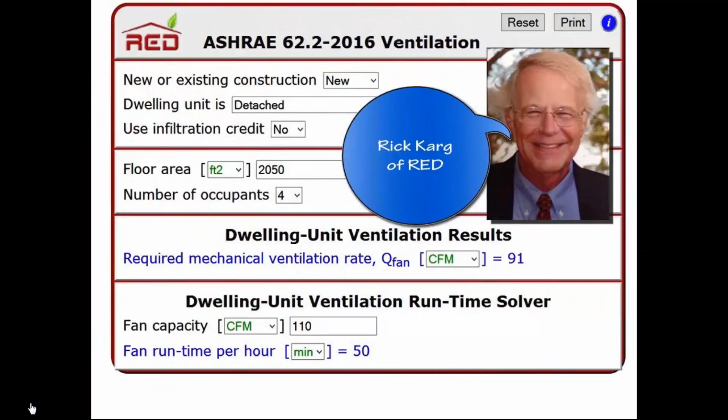I'm going to walk you through the use of the RedCalc free ASHRAE 62.2 2016 ventilation tool. This longer tutorial is for those users who have already watched the short tutorial but want to learn more about using the RedCalc tool in the ASHRAE 62.2 standard. If you're new to using RedCalc tools, please first watch these introductory videos.

This RedCalc free tool is for sizing dwelling unit ventilation in new and existing dwellings in both single-family and multifamily buildings. An important feature of all RedCalc tools is the pop-up help dialog box.

Each input label, which is black font, and result label, which is always in blue font—if you click on those labels, I'll click on floor area now, you see a pop-up help which explains what the input or the result is. It also gives you the allowed range and the normal range, and you can disengage by Xing it out. If you're using a touch device, you just touch the label, the pop-up help will show, then you can exit out the same way.

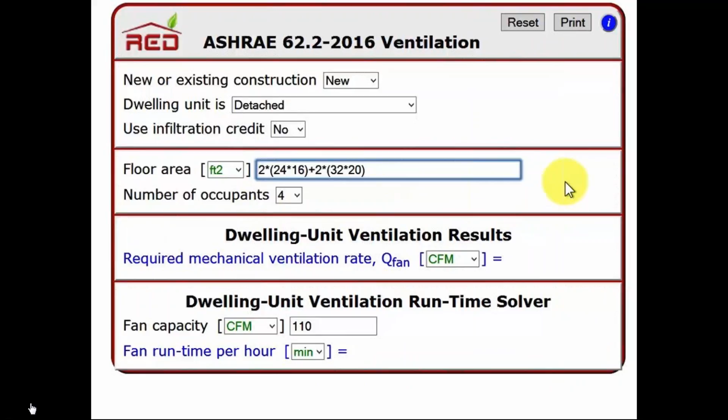Now before I make this pop-up help disappear, notice the allowed range and notice the normal range. If I go to floor area and I enter 400, which is below the normal range, I get an exclamation point indicating that I am out of range and maybe I should check my values. On the other hand, if I make a serious mistake and enter -500 for the floor area, there will be a stop sign that will show, and this will not allow me to calculate anything until I fix my mistake. So one is a warning and the other is a stop sign.

You will find with this RedCalc tool and many of the others, as you select and deselect items, the tool will expand and contract. The last time you saw this, it was smaller. I have changed some of my selections, and now it is bigger. I am going to start at the top of the tool and work down.

First of all, new or existing construction. The ASHRAE standard treats new and existing construction differently. As this selection is changed, the tool will change the things that show and the things that don't show. The example that I'm going to do will be for existing buildings.

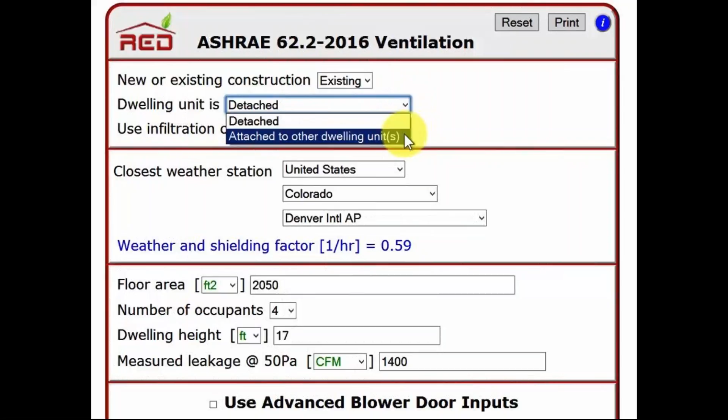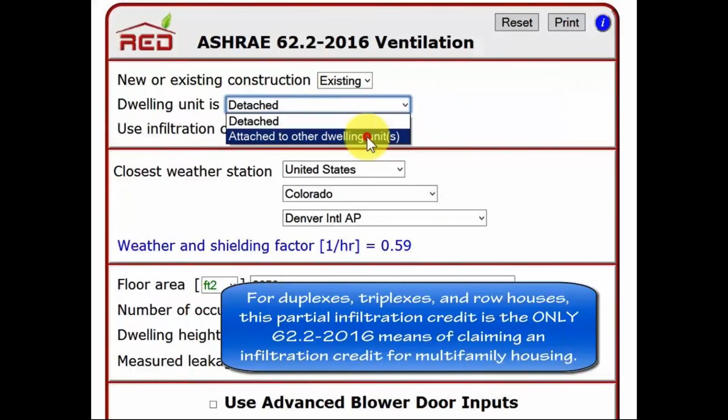The next item, dwelling unit, is detached or attached to other dwelling units. This has to do with a new feature of the 2016 version of the 62.2 standard called horizontally attached dwellings in multifamily buildings. The default for this drop-down is detached. If, on the other hand, I select attached to other dwelling units, notice that another input shows itself.

Only walls are in common with other dwelling units, yes or no. The default for this drop-down is yes. If I choose no, a number of things disappear because in this case, this is now addressing multifamily dwelling units that are stacked one above another rather than only attached side by side. So I'm going to go back now and click yes. So now this is set up to deal with horizontally attached dwelling units in multifamily buildings.

The standard allows a partial infiltration credit for these buildings, and this has to do with duplexes, triplexes, row houses are a few examples. The next input is use infiltration credit.

You can choose yes or no. Notice when I choose no, a great deal of the items in the tool, many of the inputs disappear, because much of it has to do with the calculation of the infiltration credit, which is the most difficult calculation that is done with this calculation aid.

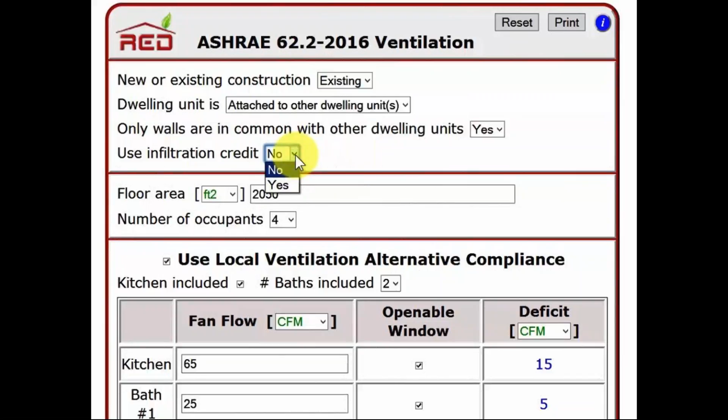I'm going to go back to yes. You should select yes if you're working on a new or existing dwelling and you wish to account for air leakage as measured by a blower door test. If you're using this tool for single-family detached buildings, we recommend you use the infiltration credit. However, if you're sizing dwelling unit ventilation for stacked dwellings in multifamily buildings, that is one above another, the 62.2 standard does not allow the use of an infiltration credit. So in that case, set this choice to no.

The next section of the red tool is closest weather station. Select either the United States or Canada. I've selected the United States. You can select one of the 50 states. I've selected Colorado. By the way, Washington D.C. is not listed as one of the states. If you go to the state of Virginia, you will find Washington D.C. Reagan Airport. So if you are working or living in the D.C. area, you will find Reagan Airport in Virginia data. Here you see for a particular state, the cities that are listed for weather stations.

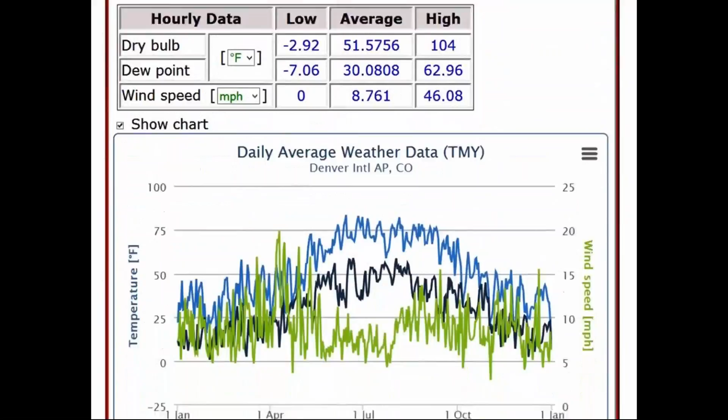There are many other good things you might be interested in with this tool. There's a lot of interesting weather data, and you can find out the latitude, the longitude of the weather station, and also the altitude. We will use this value in a little while.

Again, while you weren't looking, I switched back to the ASHRAE 62.2 2016 ventilation tool. I want to look now at the building data section, starting with floor area, where I have entered 2050. Now that's not actually what I entered. I'll show you what I entered. I'm going to click on the input box here.

This is a two-story house, as you can see from the dwelling height. And I've got 2 times one part of the house, 24 times 16, 2 times because it's 2 floors, plus 2 times the other section of the house, 32 by 20. This feature that we call Math on the Fly allows you to do your mathematics right in the input box. That's why this input box is so long, so you can do calculations like this. If I click outside of the box, you can see you get the result of your mathematics.

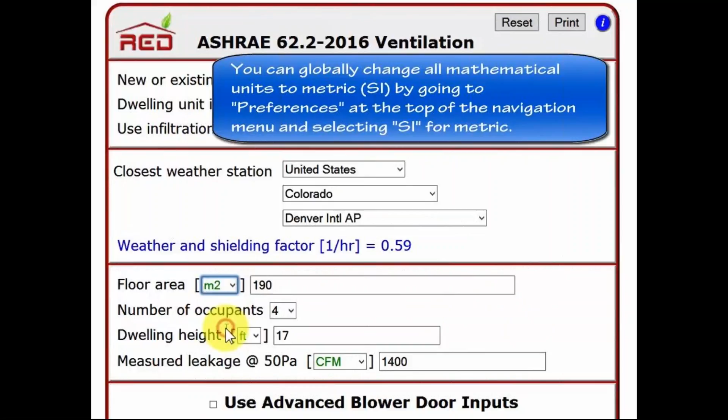2,050 square feet. Of course, you can change this with any of the red tools. We could change this to square meters. We get 190. I'm going to go back to square feet.

A question that often comes up is, should I include basement square footage in a house that I'm analyzing? The 2016 version of the standard clears this up a little bit. It states that if the basement is finished in a manner similar to the upstairs, it should be included in the square footage. Of course, the basement should also be a part of the pressure envelope of the house.

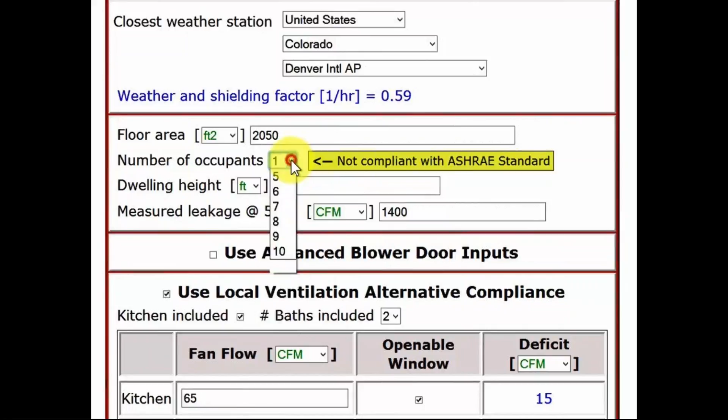Continuing with the building data section, I have scrolled the tool a bit. Next, number of occupants. You have choices here in the drop-down of from 1 to 10 occupants, as you can see. The standard does not allow 1 occupant. You need to have at least 2, but we put 1 in here so you can do what-if problems. Notice what happens if I choose 1. In the tool, a message appears to warn you that it's not compliant with the ASHRAE standard. I'm going to go back to 4 for my example.

The standard allows you to increase the number of occupants over and above the number of bedrooms plus 1. To do that, you merely have to add 7.5 CFM per occupant. The red tool takes care of that for you. The standard also says you may decrease the number of occupants from the number of bedrooms plus 1 if the authority having jurisdiction allows you to do so.

It's not as easy to decrease the number of occupants as it is to increase. To decrease, you need approval.

The next input in the building data section of the tool is dwelling height. The standard assumes 2.5 meters as the height for one floor. If you convert that to feet, that's 8.2 feet. Just in case you're wondering, I have put 17 feet in this example.

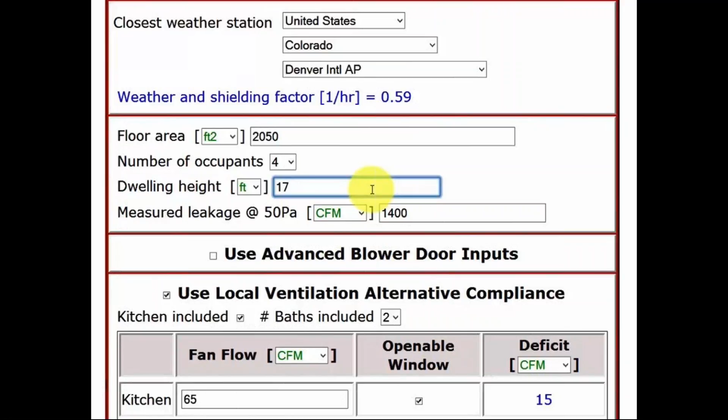The last input in this section is the measured leakage at 50 pascals. I have entered 1400 CFM at 50 pascals, or CFM50. This is a measurement you get from a blower door for the whole house. If the basement is included in your square footage, the basement door should be open for this blower door test. If the basement is not included in your square footage, the basement door should be closed - that is the door from the main part of the house to the basement. This is an important value. It is needed for the infiltration credit, just as the building height is needed for the infiltration credit.

The next section of the tool is Use Advanced Blower Door Inputs. By default, this is not checked, and sometimes you might want to use this. I'll mention when to use it, when we recommend to use it, and when not to use it. In most cases, you probably won't want to use this - it'll take a little bit more time and it makes the tool longer. But I certainly want to explain this, so I'm going to check it.

What we have here is the type of blower door test - pressurization or depressurization - and indoor temperature. If you have a great temperature difference between indoors and outdoors, it's a good idea to go ahead and use this part of the tool. I'm putting down 68 degrees indoors and 10 degrees outdoors. If you want minus 10, you would put a minus before this number.

Altitude - remember this is the Denver, Colorado airport, and from the weather station data tool I got a value of 5413 for the altitude. That's there. And of course, the temperature differences and the altitude have an impact on the density of the air, and that will affect the blower door test. So it's very important that you choose the proper value here.

Is it depressurization or pressurization? Because that affects your results. Notice if I click on pressurization, the resulting adjusted leakage at 50 pascals goes in the other direction. Our start is 1400. If it's a pressurization test with these values, it goes up to 1528. If it's a depressurization test, which is what most of us use most of the time because it's easiest, notice it goes down to 1300.

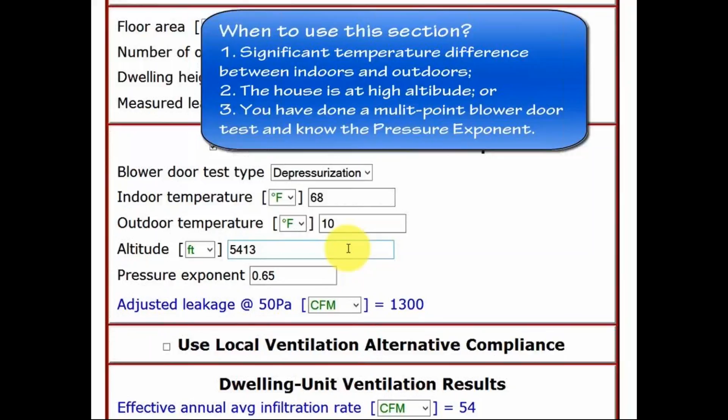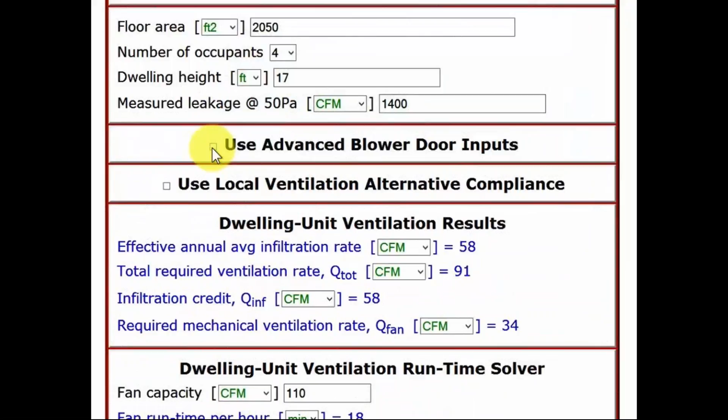Now, as far as when should you use this section - we recommend that you use it if you have a significant temperature difference, say more than 40 degrees between indoors and outdoors. Use it if you are at significant altitude, or if you have done a multi-point blower door test and you know your pressure exponent. Otherwise, it's probably best just to leave this section alone - it will make your calculations a bit easier.

Next, I'm going to talk about the alternative compliance path of the ASHRAE 62.2 standard. That is covered in the Use Local Ventilation Alternative Compliance section of the RED tool. The alternative compliance path is allowed for existing buildings only that do not meet the 62.2 standard prescriptive requirements for local exhaust ventilation fans in kitchens and bathrooms. These prescriptive requirements are a 100 CFM exhaust fan in a kitchen that is demand controlled, and for bathrooms a 50 CFM exhaust fan that is demand controlled.

The alternative compliance approach requires that you increase the flow rate of the dwelling unit ventilation in order to compensate for the deficiencies or deficits in local kitchen and bathroom exhaust ventilation. Using the alternative compliance path is not best practice, but it can save a lot on installed costs.

For the details of the alternative compliance section of the RED tool, first of all, you can select or deselect the kitchen, and notice I have entered values here already. If I deselect the kitchen, you can see it goes away. If I select it, the number I've already entered is there, 65.

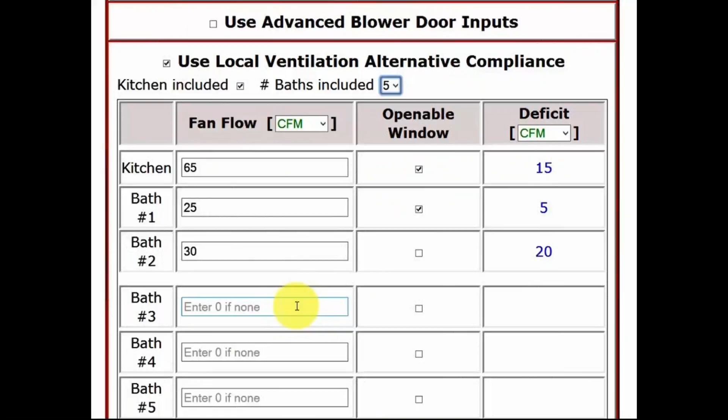And then for bathrooms, I can select anywhere from 0 to 5. If I select 5, notice what happens - there's a default in there. It says enter 0 if there is no ventilation in that particular room. That's a reminder - don't leave it blank, but enter 0. I'm going to go back to 2 for my example, 2 bathrooms.

Then in this part of the table, I have the fan flow. Now, the ASHRAE standard states that the fan flow must be measured - the existing fan flow must be measured. So that's what we have here.

Does it have an openable window or not? If it has an openable window, that has an impact on the total deficit over here. Now notice with the kitchen, if there's no openable window, the deficit increases to 35. An openable window allows you to decrease the deficit by 20 CFM. You can see as I clicked it, that happened here. Kitchen, 65, I measured it, has an openable window. I check that - makes no difference whether it has 1 openable window or 7. I click this and I get a credit toward the deficit of 20.

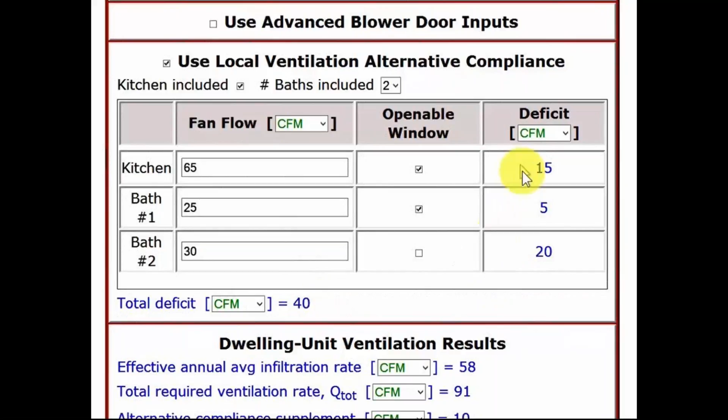Bath number 1, I measure it. It has a fan flow of 25 CFM. Bath number 1 has an openable window. It has a total deficit of 5 CFM. Bath number 2, I measure the fan. It has a CFM of 30. No openable window because it's on the interior of the house. Therefore, it has a deficit of 20. And the entire deficit, all of these added together, adds up to 40 CFM.

Now for the dwelling unit ventilation results. By the way, before the 2016 version of the 62.2 standard, this was called whole building ventilation. First of all, effective annual average infiltration rate - this is a value that you get from your blower door test, and it's an averaged constant flow rate that has the equivalent effect on air quality as the real year-round ventilation infiltration rate. So that's the infiltration. Next, an important number is the total required ventilation rate, or Q-tote.

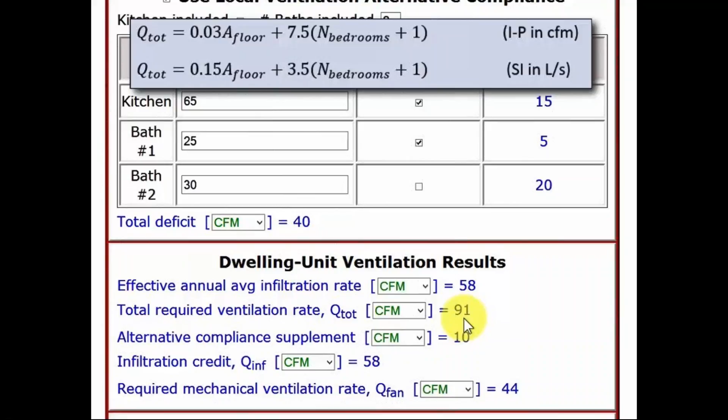Now, Q-tote comes from the equations that are now listed on the slide as an overlay. Q-tote is the total amount of ventilation that we need. This will be made up of natural air leakage and mechanical ventilation.

Next is the alternative compliance supplement. That comes from the alternative compliance path section of the tool just above. And remember, for our example, the total deficit was 40. We divide that by 4, and that gives us 10. So that number gets added to the 91 from Q-tote. So now we have 101.

Next is the infiltration credit. This comes from our blower door test also, and it is Q-inf for infiltration. And for existing homes, this value, 58 CFM, will always be equal to this value, the effective annual average infiltration rate. However, for new homes, the infiltration credit is limited to 2/3 of Q-tote, this value right here.

So we have 91. We add the alternative compliance supplement to that. We subtract the infiltration credit amount - this is the amount that is coming from natural air leakage, and the remaining amount is the required mechanical ventilation rate, or Q-fan. For this example, that is 44 CFM.

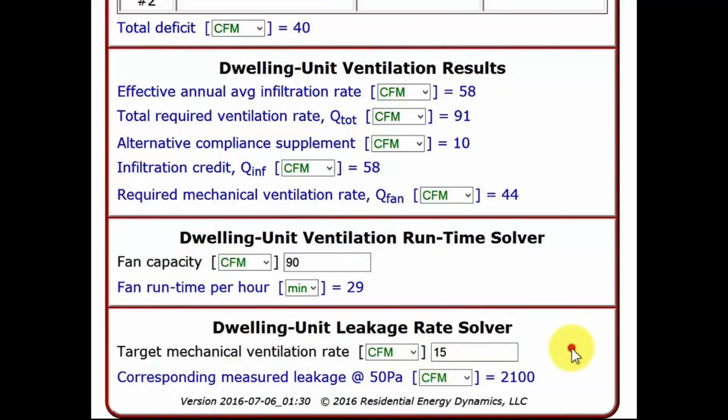You could enter any number in here, for example 0, and you'd end up with 0 ventilation for the characteristics of the building if your corresponding leakage rate was 2500. I'll go back to 15 here, click outside the box. Again, you see 2100.

Before I finish, there's one thing I said I'd go back to: the infiltration adjustment for horizontally attached multifamily. Remember, if the multifamily units are stacked, one above the other, there is no infiltration credit allowed, so you would choose no right here. But if they are horizontally attached side by side, you would choose attached to other dwellings. Another input appears, a drop down: only walls are in common with other dwelling units, and that has to be yes to take this credit.

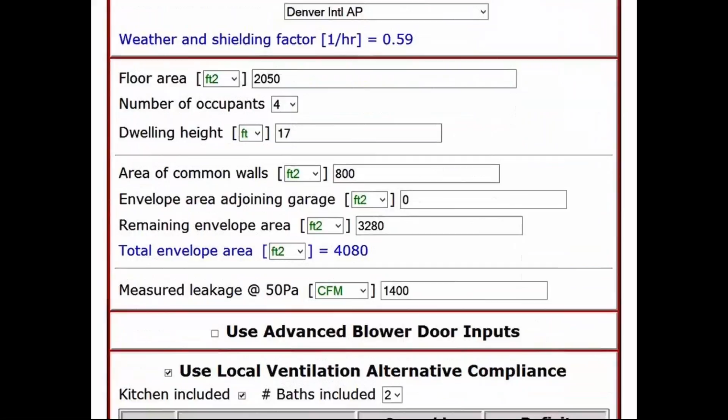If those drop downs are engaged, you will find further on down in the tool there are some other inputs that show, and you must fill these in.

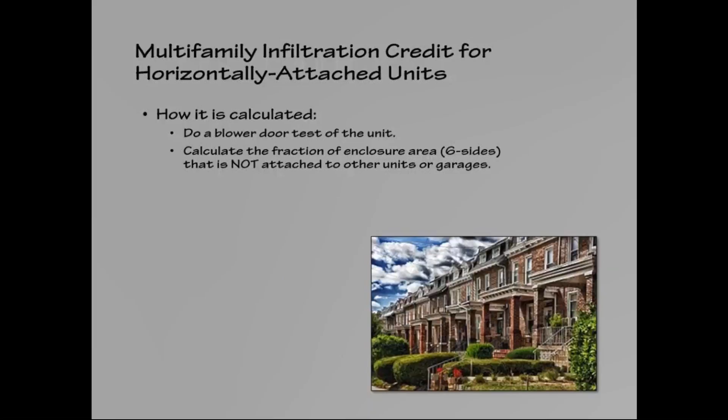First, you have to do a blower door test of the unit. What's different about horizontally attached units versus a detached unit is that with horizontally attached, some of the surface area is in common with units next to it. So we do a blower door test and an adjustment to account for the common walls. We calculate the fraction of the enclosure area, the 6 sides, that is not attached to other units or garages, and that's what we take as our infiltration credit.

We multiply the infiltration estimate from the blower door test by this fraction, shown in the equation: Q fan, the amount of mechanical ventilation we need, equals Q total minus Q infiltration. This is for detached units, but for horizontally attached, we have A sub exterior, or A sub ext, equal to the exterior surface over the total envelope surface. For our example, this ends up being 80%, or 0.8. So we're only allowed to take 80% of this amount and subtract that from Q total, so Q fan goes up.

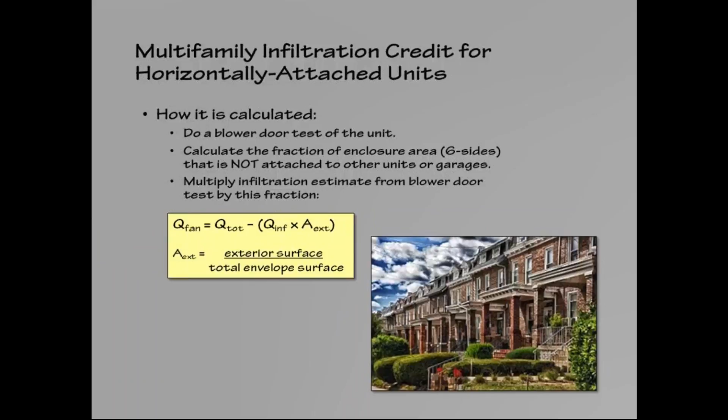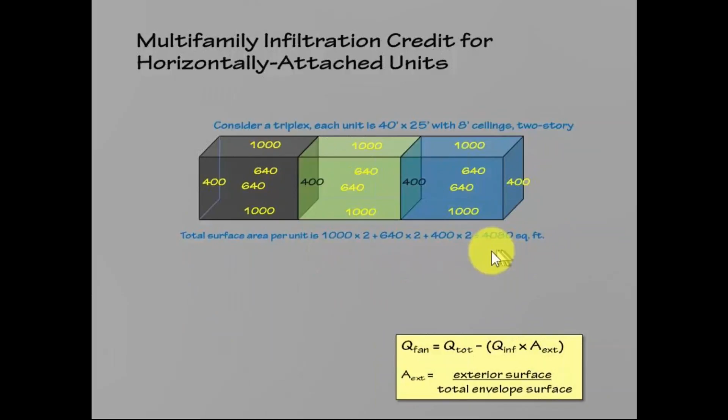So the total surface per unit is listed here, and if you want, you can stop the video and check my figures here and try to figure this out. It's rather complex. The infiltration adjustment we have here for the end units, this one and this one, we multiply Q-inf by 90% or 0.9, and for the middle unit that we're using in our example, A-sub-exterior is 80% or 0.8. So that's how we figure it out. Now you can see this is rather complex.

The nice thing about the RED tool is it does all of this for you. You still have to do some measuring and enter the values, add some things together. But remember, you can use the math on the fly of the RED tool. It helps you out.

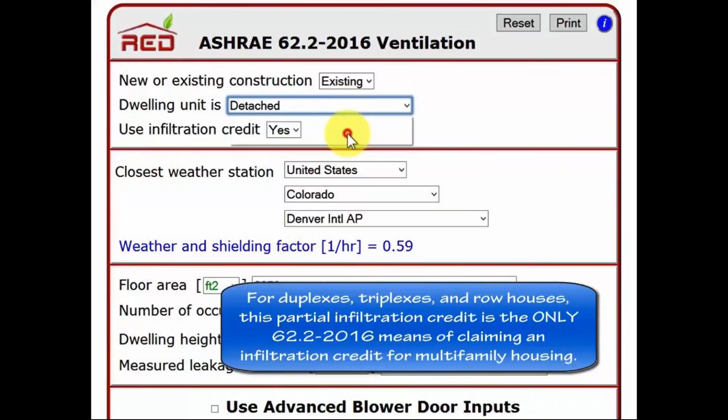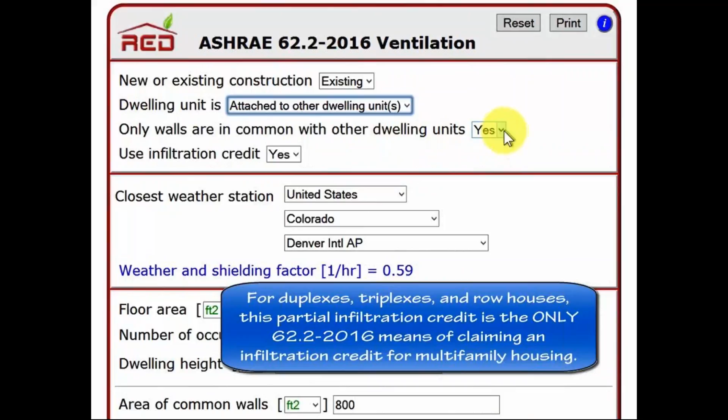Continuing the horizontally attached multifamily dwellings in the RED tool, our example so far has been with dwelling unit is detached for the horizontally adjacent units. I'm going to select the dwelling unit drop-down. Then a new thing appears: only walls are in common with other dwelling units. The default choice for that is yes.

And then as we scroll down past the weather station data, that's going to stay the same. The beginning of the building data, we're leaving all those the same. But then this new area appears when we select the drop-downs for horizontally attached dwelling units above. And from our illustration that we just looked at, the area of common walls, we're looking at the center of the 3 row house units, 800 square feet. Envelope area of adjoining garages, we have 0 for that. And then the remaining envelope area, 3,280, which gives us a total of 4,080.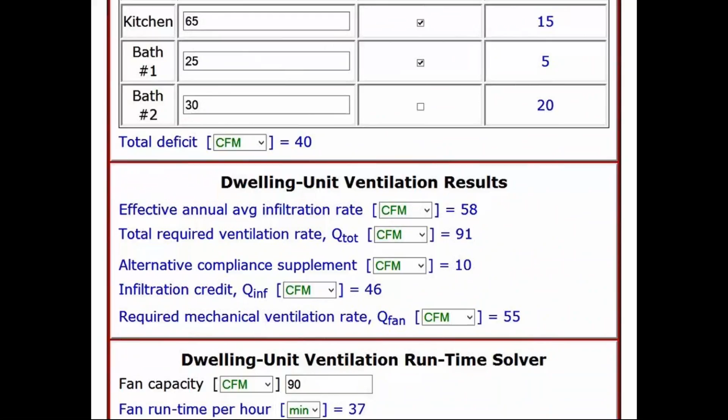Now that has an impact on the infiltration credit. Remember, with the illustration, we came up with an A-sub-exterior value of 80% or 0.8. So now you see our infiltration has gone from 58 - we still have that value up here - but we take the 58 and multiply it times 0.8, which gives us 46, or 46 CFM is what we get for the infiltration credit.

So the infiltration goes down, which means a larger portion of Q-tot has to come from mechanical ventilation. So our mechanical ventilation goes up to 55 from 44 that we had with the single-family detached dwelling.

So I hope this shows you how the horizontally attached infiltration credit feature of the RED tool works. And of course, the RED tool is based on the ASHRAE 62.2 standard precisely, so you can be confident that everything that you do with the RED tool will comply with the ASHRAE 62.2 2016 standard.

Mm-hmm. And close. Present PowerPoint. Yeah, there you go.

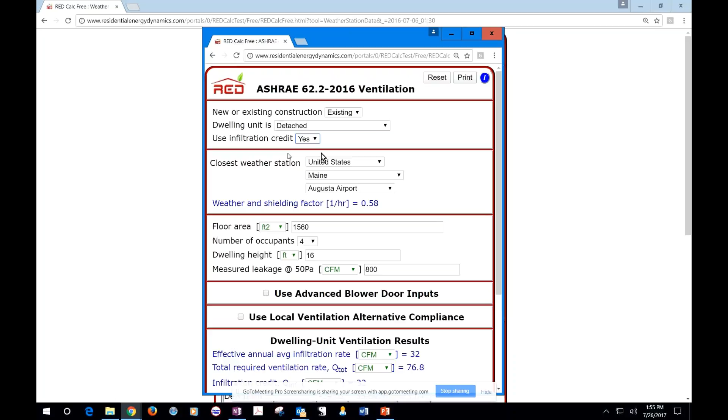So what you would have to do on the tool, I'm going to drag the tool in front of you. You would just click no there. Use infiltration credit, no, and that would go away.

If you're not using an infiltration credit, you can see that most everything in the tool disappears, and that's to prevent you from entering something that's not needed or does not correspond with the ASHRAE 62.2 standard. Notice there's no place now to enter a blower door number, since a blower door value is only needed if you're taking an infiltration credit. So if you've got multi-family units, there's no blower door required. It's merely the ventilation rate based upon the floor area and the number of occupants, and that's it.

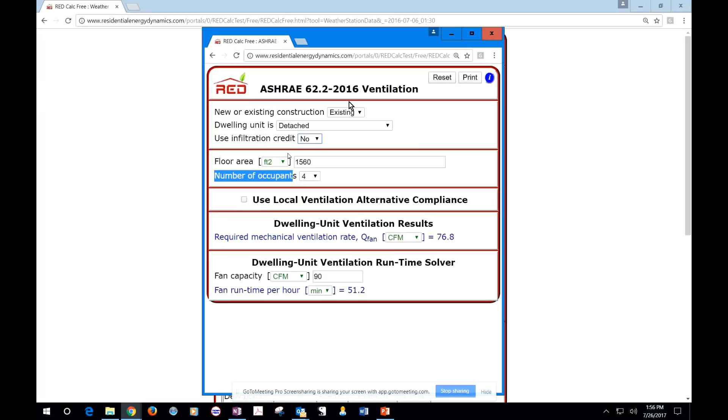And it's good to ask yourself, if you go across state lines for this, is Berlin a lot like Bethel in terrain and all of that? And the answer is yes. I would not choose the Mount Washington weather station, which is the most severe of all 1,100 weather stations in North America because of its high wind. So that one you just leave alone - you never choose that, even if you're right in this area of Maine. It'd be best to choose Berlin.

Now here we have a triplex, but in this case the units are not horizontally attached, they are stacked one above another. So what they have in common are floors and ceilings. According to the ASHRAE standard, no infiltration credit is allowed in this case.

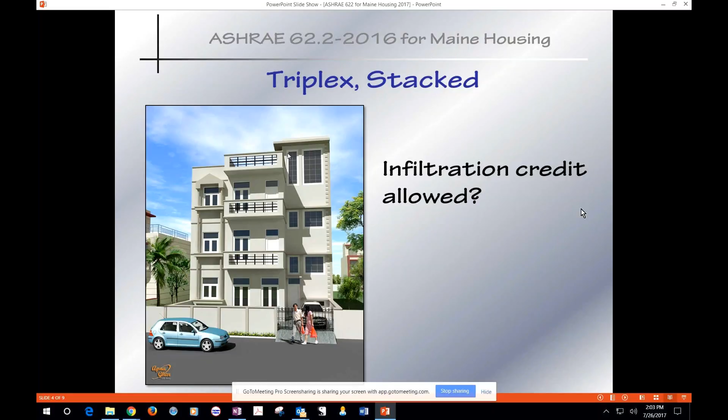Okay, so no infiltration credit is allowed here. With this one, we have a triplex again, and each unit is on 3 floors. Garage is primarily the first floor, living area, then bedrooms on the third floor. Is an infiltration credit allowed here? The question to ask is, is the only common building assembly walls? If that's the case, then a partial infiltration credit is allowed. You can go through that on the red tool, and we will do another example. There are no stacked units here, so this is allowed a partial infiltration credit.

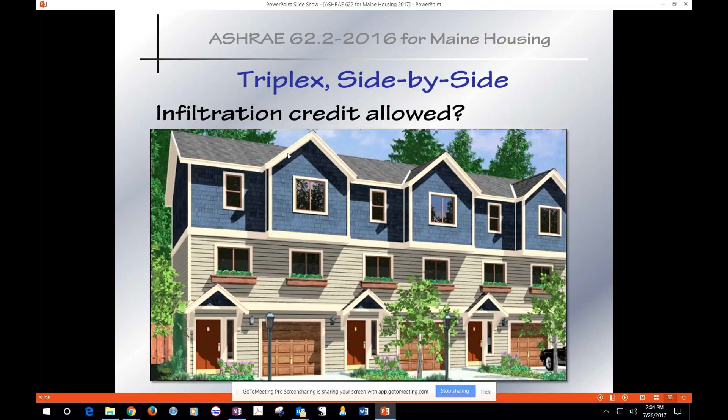So just to briefly go over what the video looked at: this is the way in the ASHRAE standard, right out of the standard, this equation, the Q-fan equation. How is it calculated? We do a blower door test. Now, the standard does not specify how to do the blower door test.

Let's assume you are looking at a duplex or triplex, and you're looking at one of the units. What's the best way to do a blower door test? Some of you might know what a guarded blower door test is. It's one of 3 ways you could do a blower door test in a horizontally attached building.

Let's say you've got a duplex and you want to do a guarded test. To do a guarded test, you would need 2 blower doors. You would depressurize each of the units to -50 pascals. For the subject unit, this eliminates any leakage through the common wall, so you only have leakage through the exterior walls. That's one way to do a blower door test on a duplex.

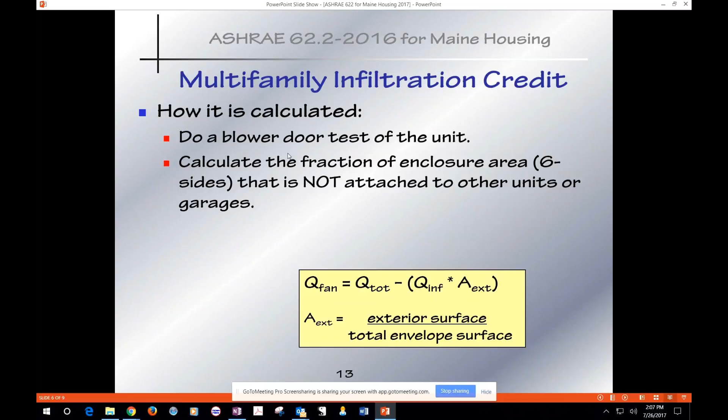There's a format for you to enter those values in the red tool, and we will go over that. Multiply the infiltration estimate from the blower door test by this fraction. We get a number here. Oops, I didn't mean to do that. We calculate A exterior as mentioned in the video.

So here we are. Let me just get a sense of where I am. I'm sorry about this. Okay.

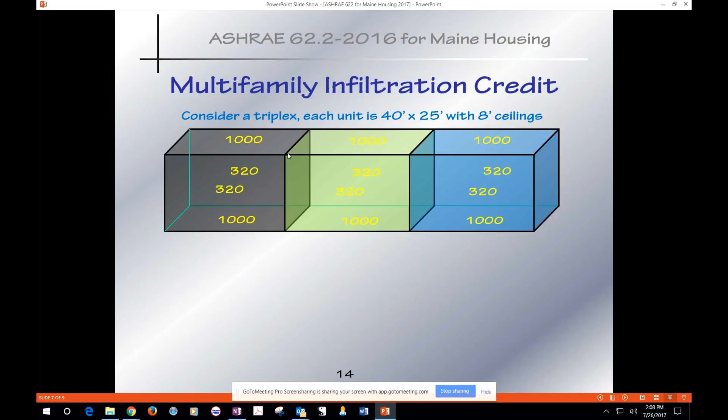So that's how this would be measured. Don't forget to measure the floor. So the total surface, as you saw in the video, and you can go back and look at that video anytime you want. It will stay online for you.

So you can see we've got here, the end unit gets 93%. Now what that means is that 93% of the end unit is leaking to the outdoors, and the remaining part, about 7%, is leaking to the other unit. What we're trying to do with this procedure is eliminate this leakage.

And then the middle unit gets the 86, as you can understand, because it's got 2 common walls. So it gets a smaller percentage. So that's quickly the procedure.

Now let's do an example specifically for this duplex. In the example, I have ignored this punch-in entry here. I'm just assuming it's not even there, to square the building off. So it's a duplex side by side.

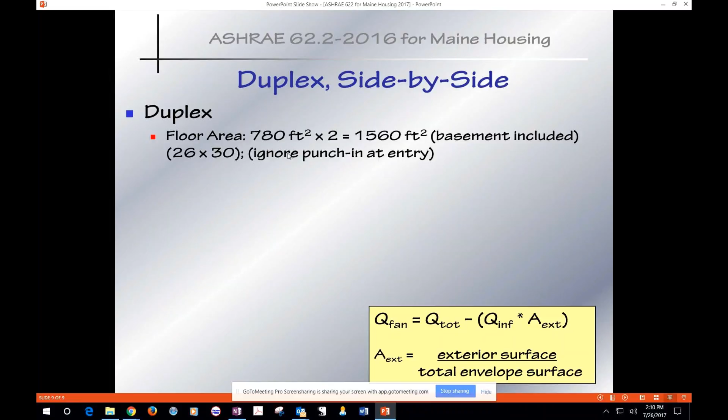So what we've got, I'll just go over the numbers here, then I'll bring the RED tool in front of us. Here's the floor area for one of the duplexes. I'm assuming that the basement would be included as part of the floor area.

This can be a big question. This is something that the ASHRAE committee is working on, but is finding is a difficult issue, whether to include a basement or not. So floor area, one floor is 780, and we've got 2 of those, the floor where the major living is, and then the basement. The basement is included.

3 bedrooms, it's in Augusta, so that gives us other data we need, the weather station to use, and if it's 3 bedrooms, that means it's 4 occupants. The blower door number for one unit is 800 CFM 50. The height is 16 feet.

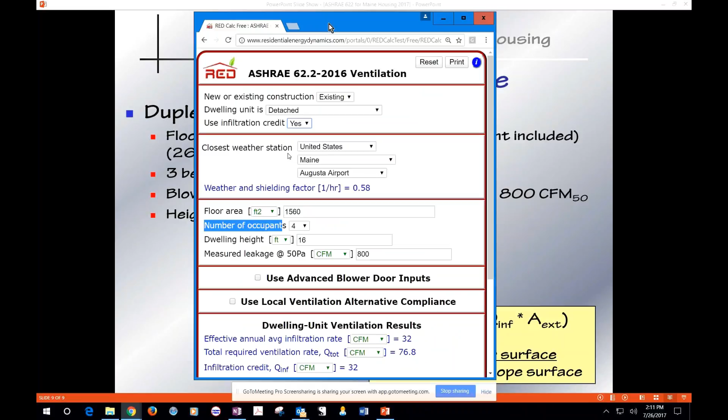Now, height, square footage, floor area is one question that comes up a lot. Another one is the height. Now, I'm just going to take a moment here to bring the tool over. And what I'm going to do is click on the label building height.

If you're using a tablet or a smartphone, you would just touch building height. I hope you can see what it says here. This is pretty much right out of the ASHRAE standard. It's the vertical distance between the lowest and highest above grade points within the dwelling pressure boundary. Notice it's pressure boundary, it is not thermal boundary, pressure boundary.

So that is where the building height comes from, and floor area in the current version of the ASHRAE standard: all enclosed above and below grade finished areas suitable for year-round use. Include basements or parts thereof only if they are finished in a manner similar to the rest of the dwelling. That is the current definition in the ASHRAE standard.

So that means that part of the basement might very well be included in the floor area and part may not be included. That certainly causes a challenge if you're trying to do a blower door test. If the basement is included in the floor area, then the basement door should always be opened when the blower door test is done for purposes of calculating the ASHRAE standard.

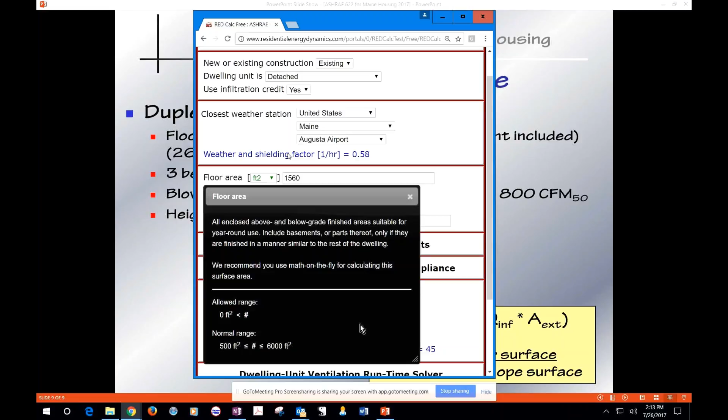Understand that the blower door of record that you put in Hancock to calculate energy and potential SIR for air sealing might be a different blower door number than the one you used for putting in the RED tool for calculating the ventilation rate.

So any questions about floor area or height before I move on? If there are, please unmute yourself and just ask the question. Okay.

So we have the height here. It's 16 feet because there's a walkout basement in the back.

Hey, Rick? Yes. Rick, this is Al. Yes. Yes, Al. Randy Burgess had a question about the stacked multifamily units. Yes. His question is, for a stacked multifamily building that has multiple levels, what do you use for building height?

That's a good question. For stacked multifamily, what you're doing is using... and the standard really doesn't cover that well. I don't think I've ever been asked that question before. All right, good question. Yeah, and I can't believe I've never been asked that question, nor have I ever thought of it myself. So, great question.

The standard should specify this because you can do this in different ways. What I would suggest you use is the height of the building.

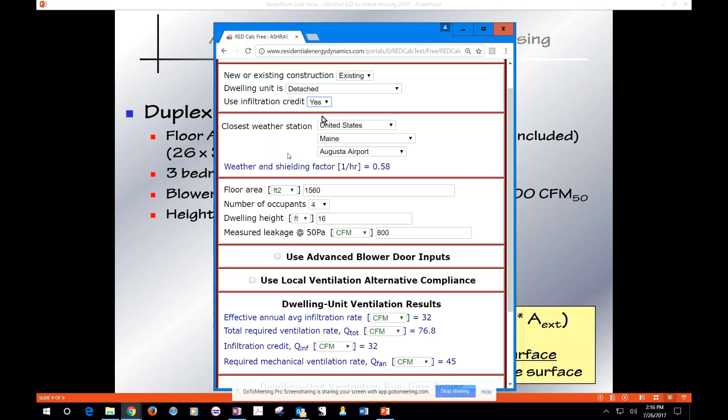But let me show you something. I've got the tool, and this kind of overrules everything I just said. This makes it a moot question. In that case that Randy mentions, these are stacked multifamily. So watch what happens. No infiltration credit is allowed. So what I'm going to do is click no, and notice height is gone. That's what I was wondering if that would happen, because I remember you said if they're stacked, you don't get

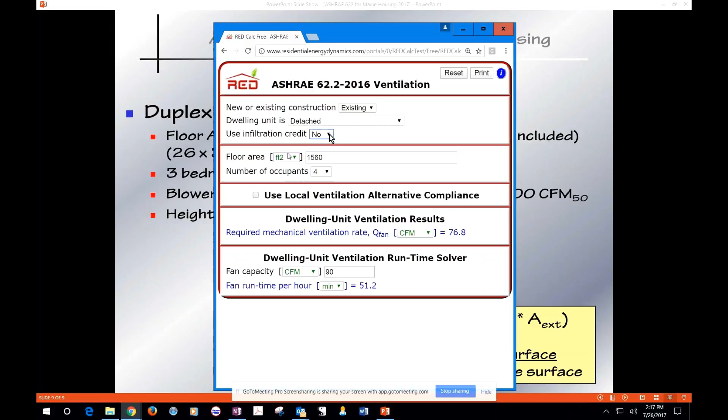an infiltration credit, and the height is used to help calculate the infiltration credit. Yes. So actually, you have dealt with this. You just didn't remember that you did. I didn't remember, that's right. But many, you know I'm getting older.

And the only reason we need height and weather station is if we are taking an infiltration credit. And if we're not, we don't need a blower door number, we don't need height, we don't need the weather station, because the weather station also has to do with the way infiltration is dealt with. The blower door number is interpreted, and it helps us determine the air leakage. So with no infiltration credit, many things disappear.

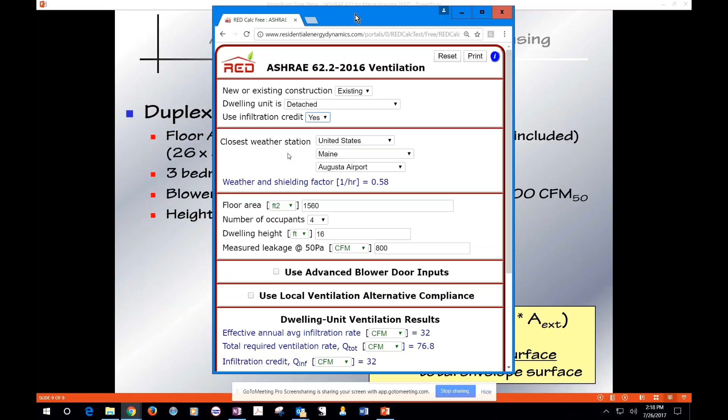So Randy, good question, but we really don't need to ask that question because it's not relevant with the way things are calculated. So I hope that answers it. Thank you, Rick. It's still a great question. I like the question.

So we've got the height. The area of the common walls for this duplex is 480, 30 feet, which is from front to back on the duplex, by 16 feet high. This includes the basement dividing wall, the basement common wall, and the first floor common wall.

And then the total envelope surface, which is something that is needed, and this takes measuring. There's no way to get around it, you're going to have to measure. Everything is included here, and we get a total of 3352. And then the remaining envelope area of the tool is

2872. Now notice this is in quotes, remaining envelope area, and area of common walls is in quotes. That's because both of those are entries in the RED tool. We'll look at that in just a moment. 480 plus 2872 is equal to 3352. So the common walls plus the remaining envelope area equals the total envelope surface.

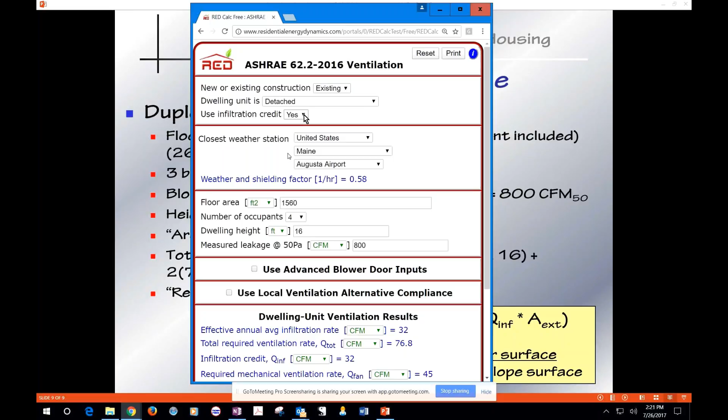This is new for the 2016 version of the standard. And for our example, we're going to use, it's attached to other dwelling units. Now, with Randy's question that he brought up, I said, okay, how about a 3-story stacked multifamily building? In that case, you would just hit no there. No infiltration credit is allowed, and you can see there really isn't much to do to calculate the infiltration rate anymore.

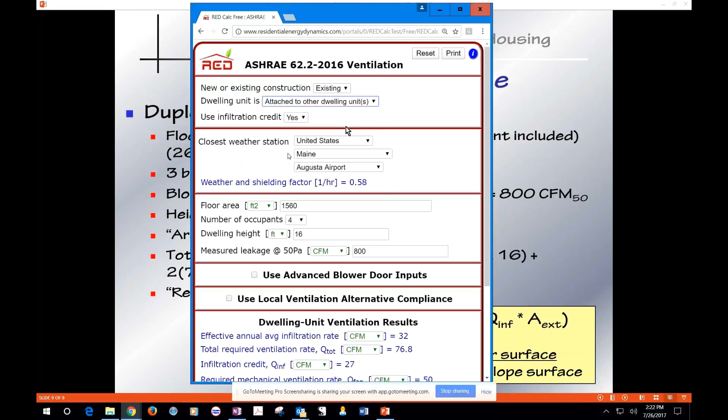But you can still use, in that case, the local ventilation alternative compliance feature. So I'm going to go back to yes, we want to use the infiltration credit, and that is to your advantage whenever you can, and to your client's advantage. If it's the duplex that we are working on, it is attached to other dwelling units. Are only walls in common with other dwelling units? Yes. In Randy's example, the answer would be no. I just hit no, and you can see infiltration credit automatically goes away.

But for us, because this is a duplex, a side-by-side duplex, I click yes here, and I am entitled to an infiltration credit. The house is in Augusta, so I have chosen United States, Maine, and Augusta.

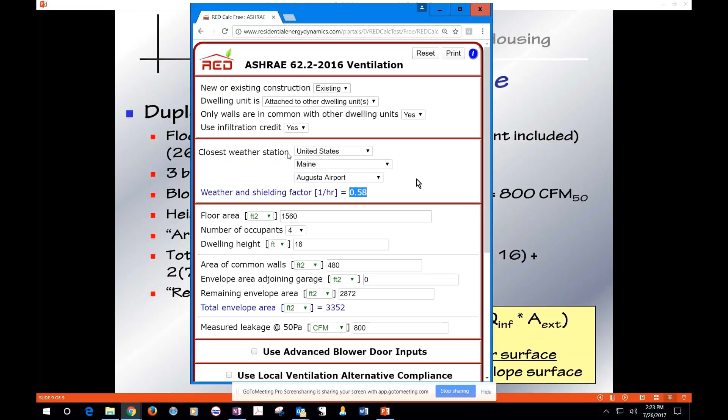And this is the weather and shielding factor right here. The weather and shielding factor for Mount Washington, just by comparison, I think is 1.51. If you go to the southern states, some of them are 0.3. It gives you a sense of what happens to that number.

The floor area from my example is right there, 1560, and I could do this math right here, looking at the slide, in this space, math on the fly. For example, I think I can do this and still look at this. If I want to do the math here: 780 times 2, and then I hit enter and I see 1560, same thing. So hit enter or click outside of the box and it's 1560, but if I click inside of the box, I can see the mathematical expression I put in. That's why this box is so long, so you can do math on the fly here if you want to.

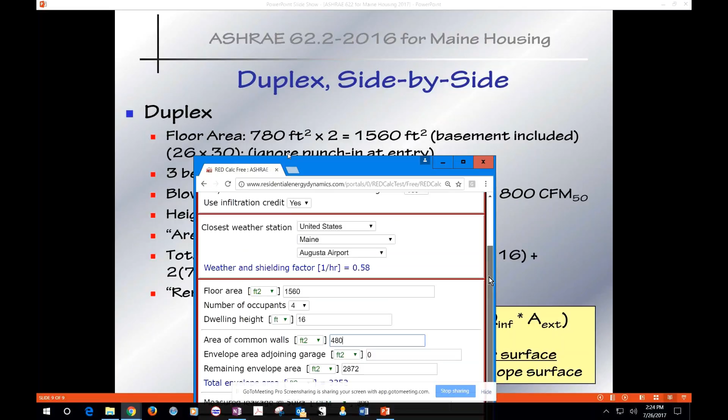You can do that in almost all of the boxes where it's appropriate. Building heights, you can do it there. You can do it here in area of common walls and many other places in the red tools. So I'll bring this back up here again.

So area of the common walls, this is a measurement. Oh, I'm sorry, I've got the number of occupants, 4, there are 3 bedrooms, and the dwelling height is 16 feet. You can change units if you want, I don't know why you would want to do that, but it shows you what that is in meters.

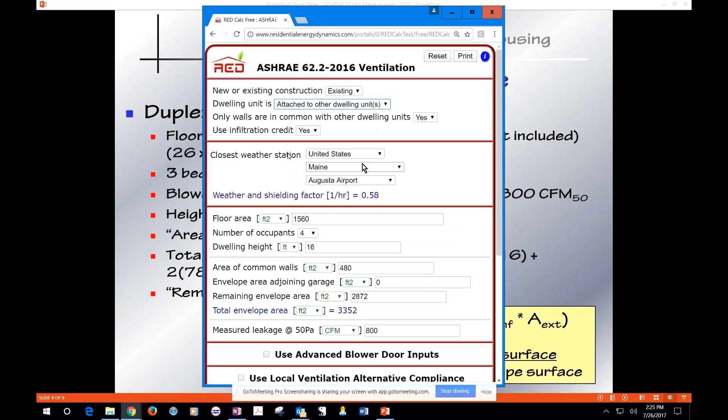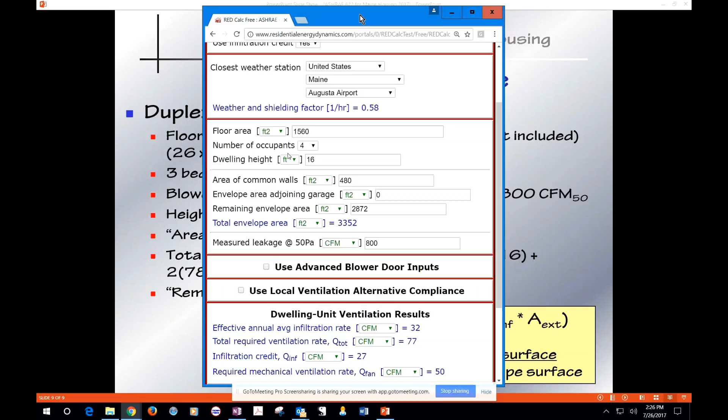Area of common walls, 480 square feet. Envelope area adjoining a garage in a building like this, that would be here. By the way, if I say that this is detached, notice that the section of the tool we were just looking at goes away. Now I'm going to go back, that's so you don't fill it in unnecessarily and make mistakes. So here we are again. Remaining envelope area, 2872. And those correspond with this value, area of common walls, and remaining envelope area.

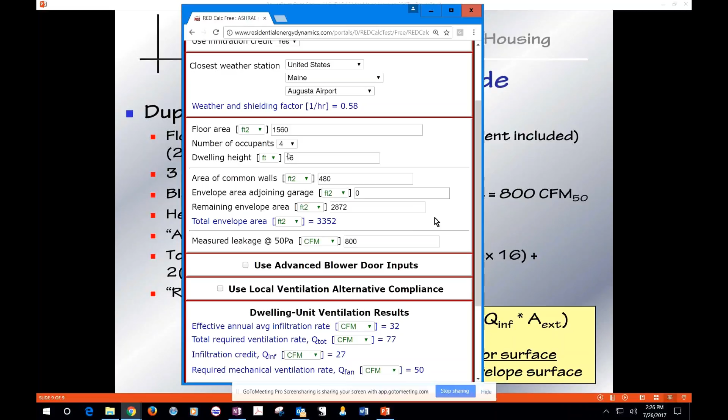So those are entered here, and you just have to do measuring, no way around it. So the total envelope area is here, and this figures out, although you can't see it, the value for A exterior right here, which is 0.86 or 86%. Now what that means is that 86% of the surface area of this duplex is exposed to the exterior, and the remaining percentage, 14%, is exposed to the adjacent dwelling unit.

So we're eliminating that and reducing the blower door value by that amount, assuming that that's giving us a good idea of what the leakage would be if that wall weren't there, which is certainly open to a lot of questions. So the measured leakage, you do the blower door test. I mentioned there are three possible ways for doing the blower door test. Here we do the blower door test, I'm not sure how we did it, I can't remember, but we end up with 800 CFM50.

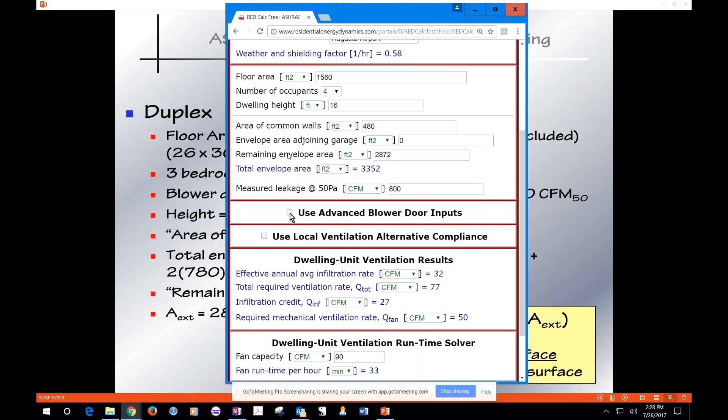So that's where we are, we've gathered a lot of data. A question came up during the video: when might you use this advanced blower door inputs in Maine? It's really not an altitude thing in Maine, there aren't a lot of high altitudes that change the density of air much.

I would say that if it's really cold outside, it's probably a good idea to use this because it will adjust it accordingly so that in more normal temperatures, the ventilation rate is calculated as it should be. So I don't know, I'm just pulling this out of my hat, but if it's below 20 degrees, I would suggest you use this. So for indoor temperature, especially if it's a loose house, we'll say is 70, and the outdoor temperature is -10. And click outside of those boxes, you can see what it does to the blower door number.

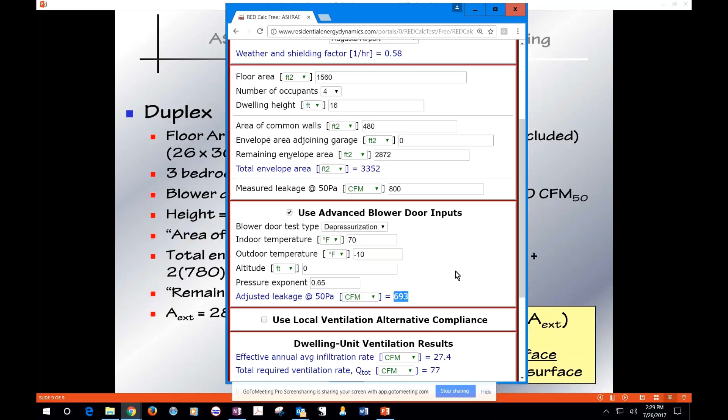The actual blower door number - remember from the video, now that number with this box checked right here, that 693 CFM50 adjusted will be used for calculating the ventilation. If I unclick this box, the 800 will be used to calculate ventilation, and you can see it's gone down.

But if I unclick this, those entries are still there.

Another time you might use this in Maine is if you do, for some strange reason, a multi-point blower door test and calculate the pressure exponent. Let's say it is 0.7, and notice that changed the number. But I've really never heard of anybody in Maine routinely doing a multi-point blower door test.

Now, if you use TECTITE, I have seen that. If you use TECTITE, it does it automatically, and it does generate for you the pressure exponent. I would then use this section of the tool and put the pressure exponent in there. But that pressure exponent should be the

post-weatherization pressure exponent. When you weatherize a house, when you tighten it, the pressure exponent will usually change, so it will usually go up. So it gets kind of complicated. The best thing might be just to leave that alone.

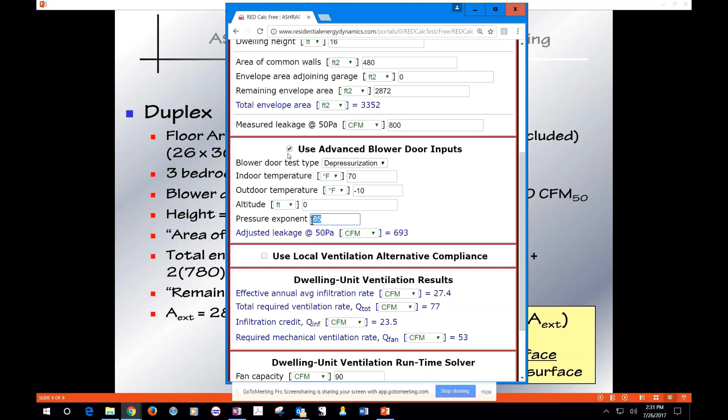So I'm going to get out of here now.

This is the effective annual average infiltration rate, 32 CFM, and we are taking 86% of that as calculated right here on the slide. It does not show that 86% on the tool, but you could figure it out. That ends up being 27 CFM.

So what we're doing is saying that of the total amount of fresh air needed in this unit of this duplex, Q tot, that value is 77. That's what we need based upon square footage and number of occupants. 27 of that we're going to get through infiltration on average over the year. So we must supply 50 as the required mechanical ventilation rate, or Q fan.

Q tot comes from two places, both natural infiltration - the infiltration credit, that's what we use to calculate that - and mechanical ventilation. So for this duplex, without using alternative compliance, we need a dwelling unit ventilation rate operating all the time of 50 CFM.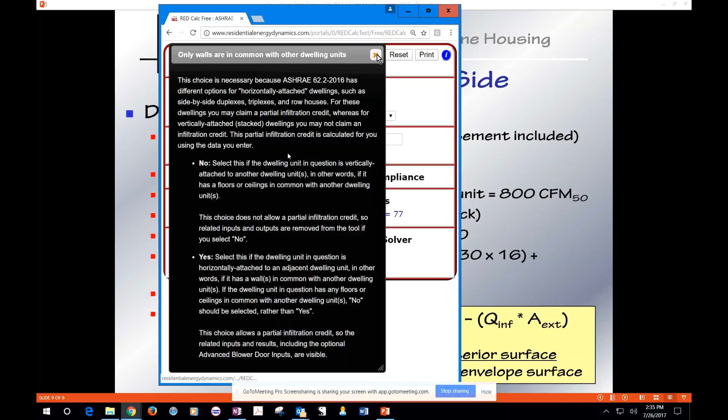And we try to be thoughtful when we come up with statements like this, and the ASHRAE standard really doesn't include language like this. There's a lot more language there to tell you how to use this, but the key to this is only this particular line here. Only is really important. Yeah, that's what I wanted to clarify, just to make sure that was the operative word there. Yeah, thank you, okay, well, that's good.

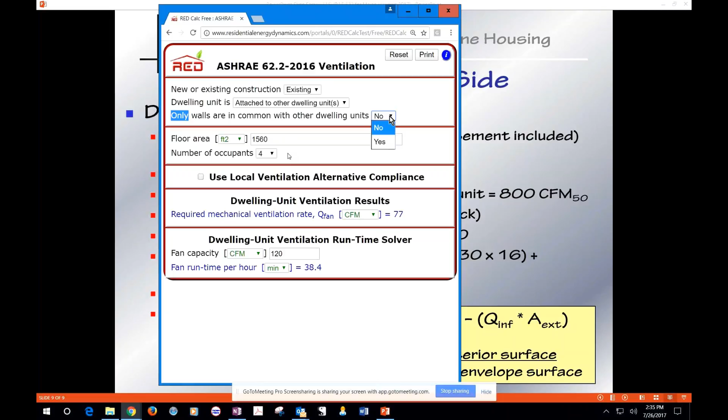So now what I'm going to do is open up the alternative compliance section. It's very likely if you do a house like this in Maine, a duplex like this, you will use the alternative compliance feature because it can help you out.

For an existing home, you may use alternative compliance for an existing dwelling unit in a multifamily building. You may use it, but not for new dwelling units, whether detached or multifamily. You can only use it for existing units, and the primary purpose of the alternative compliance path, which is Appendix A in the ASHRAE standard, is for...

Kind of saving your butts in low-income weatherization, because otherwise you'd have to be putting a 100 CFM kitchen range hood in most kitchens and a 50 CFM fan in all bathrooms, and that's a lot of money. So this is a way to save you money, and if this duplex has no...

Kitchen fan - and by the way, this was mentioned in the video. There's a placeholder here that says enter 0 if none. Randy Burgess asked a question during the video: when would a kitchen fan not be part of an analysis? Well, in my opinion, Randy, it's always part of the analysis.

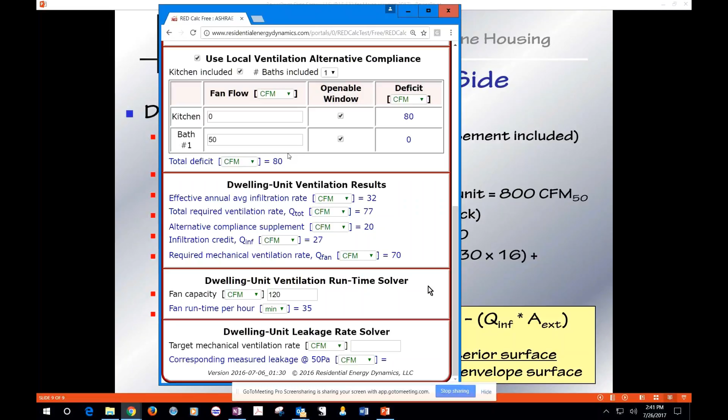We can decrease that by the infiltration credit. We subtract 27 from that, and we get a required mechanical ventilation rate of 70. So that's how that would be calculated if we use the alternative compliance approach.

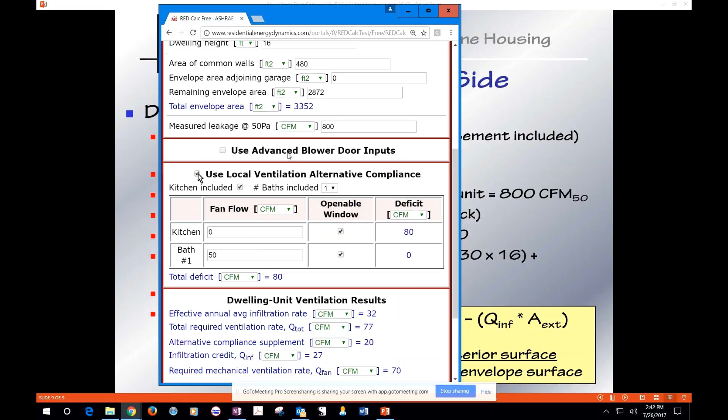And you might say to yourself, well, why use the alternative compliance approach? Because the dwelling unit ventilation rate was 50 - what's the benefit of using the alternative compliance approach, because now it's gone up to 70? Well, if you use it, you don't have to put in a local kitchen fan. And if you don't use it, yeah, your dwelling unit ventilation rate is 20 lower, but now you have to...

Install at least a 100 CFM range hood or a 300 CFM fan in the kitchen that's not a range hood. That's something new with the 2016 standard. Yeah, a good thing to avoid.

And then you'd have to put in a sealed combustion Jenn-Air - you have to put a Jenn-Air. Yeah, the Jenn-Air has to be at least 300 CFM, and they are anyway.

So I've gone through the tool, I've gone through this particular example, and I've tried to point out parts of the tool that are even a bit unrelated to the example. Are there any remaining questions before I cover a few other things?

I don't see any on the chat.

I'm going to tell you now how to use this tool, or any of the other RED tools, out in the field where you have no internet connection. I know, especially for some of you in Maine, that happens quite often. We do not guarantee that the tool will work, but I've never heard of a case where it won't work if you do what I'm going to tell you. Although we decided that we will not put this in writing, just because we can't guarantee it.

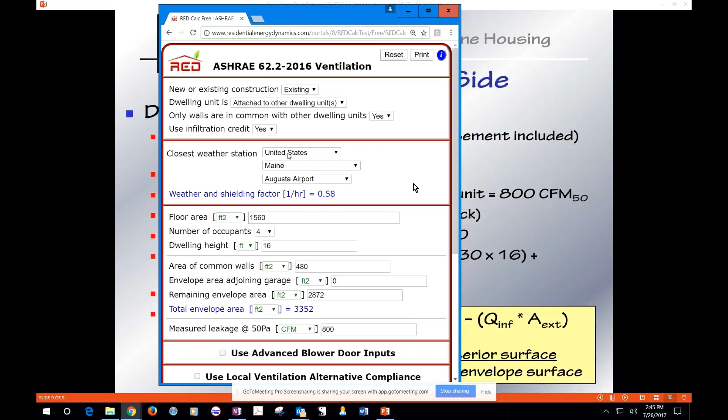So if you're using a laptop, open your favorite browser - we prefer Chrome, but open your favorite browser and load the tool. I'll make this look more realistic. Let me see if I can do this here.

I'm using special features, but this is what it looks like for you. So you would open this up on your laptop, tablet, or smartphone when you go out in the field. Before you go out, you load it up. If you think you're also going to use the ZPD tool - well, you probably won't do that, but I'm just going to show you what to do if you're going to use that too, or another tool.

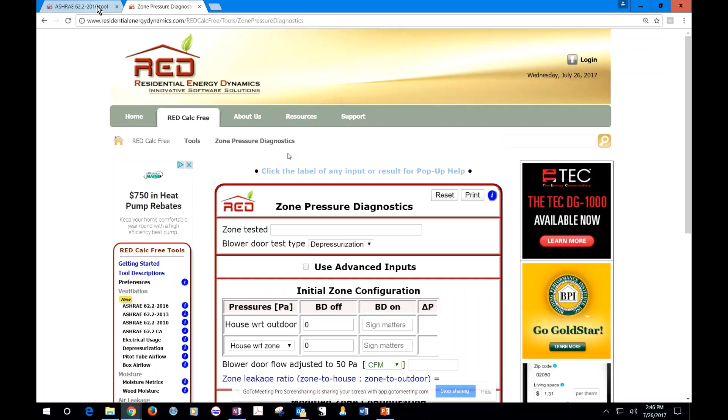Now notice, I hope you can see it, I've got two tabs on my browser. Both of these are open. If you want to open five RED tools before you go out in the field, that's fine - then you'd have five tabs. So here's the 62.2 tool, as I just used it.

So now I can go out in the field and use this and change things as I'm doing now. You'll probably not need to change the closest weather station, but you can change things as long as you avoid two things, and this is important.

So now, let's say you're using a tablet - is that what you use for a Hancock? Use tablets? Yes, mostly tablets. And a lot of people do use their smartphone too. Okay, let's say you've got a tablet out in the field and you've loaded this into the browser - maybe that's Safari, which is the Apple browser.

You go out in the field and you can use this all day long, as long as you do not hit the reset button right here. Don't hit the reset button, because if you do, it attempts to communicate with the server, and if you're out in the field and don't have a connection, it can't connect with the server.

So you'd be stopped in your tracks. The other thing that you should not do is refresh the screen. I'm at the upper left now - this is where the refresh button is for Chrome. Don't try to refresh the screen, because again, it tries to communicate with the server and you'll be stopped in your tracks for the day.

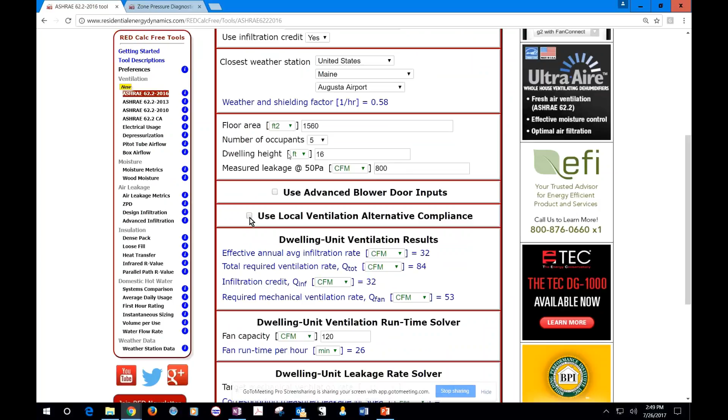You can later print that photo, text it, or email it. One of the reasons I like this, even if, this is back to Randy's question, if there's no fan in the kitchen and I'm not going to put one there, I could just unclick this and kitchen goes away.

No, I'm sorry, I've really confused things. There's a fan in the kitchen. It's already there. It's giving us at least 100 CFM, so I can choose to ignore it. Well, I might decide, well, the kitchen's already set, it's qualified, unclick it.

The problem with that is now you don't have any record about the kitchen fan. If you click this, now when you take a screenshot of it and maybe put a printed record in the file, you can see that the kitchen has got a fan in it that qualifies for the minimum local ventilation requirement. And that's a positive thing, I think. You've got to document things.

So, any questions about using the tool or any of the RED tools out in the field without a connection?

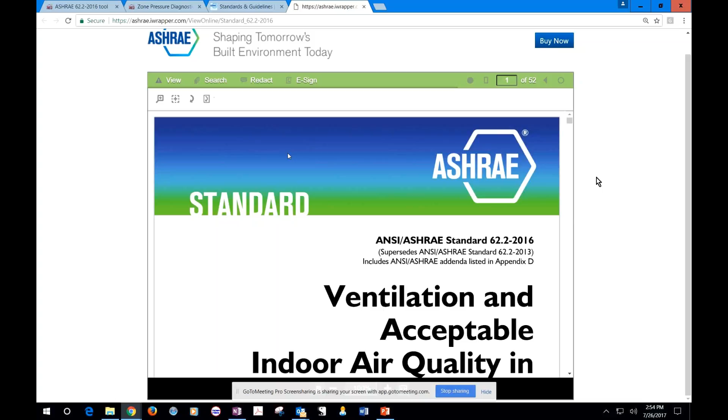You cannot get here directly, as I've already said. Now I'm going to the standard, and here it is. You can see it's 52 pages up here, and the condition is that, first of all, you can't print this, nor can you save it. But you can search it, that's really helpful. There's a search up in the upper left, and the whole thing is here.

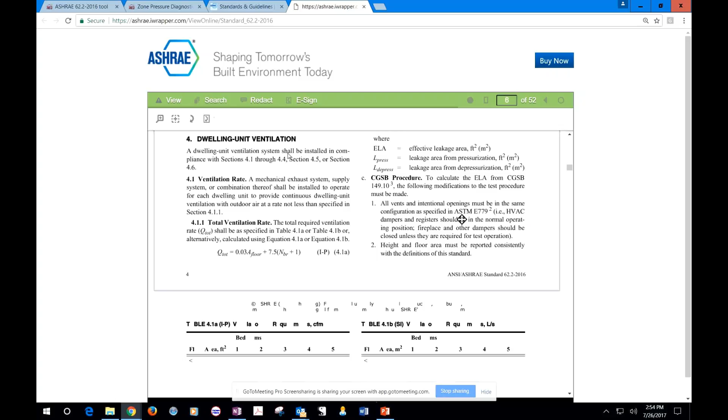I'm scrolling through it now. Everything's here. So you can read the standard, and here's section 4, very important section 4, dwelling unit ventilation. Notice I can't even copy text, so they've protected it, but you do have the option to read through all the nitty-gritty of the standard if you ever need to do that.

Maybe you won't, but if you ever need to, there's really no reason to buy it. But if you do want to buy it, right up here in the upper right is a buy now. So that's how to read it online if you need to do that. So I'll get out of that now and back to the 62.2 tool. That's it for my prepared remarks. Are there any remaining questions?

I don't see any questions on the chat box.

I want to invite you to filter questions through Al and Liz, probably best to do that first. They might be able to answer them. But I am very happy whenever need be to field questions from Al and Liz or any of you directly.

You can get in touch with me or my business partner Charlie Holly through the red website. There is support right here. You can go to the support desk and ask us a question, or you can come to me directly. I'm happy to do that whenever you feel the need.

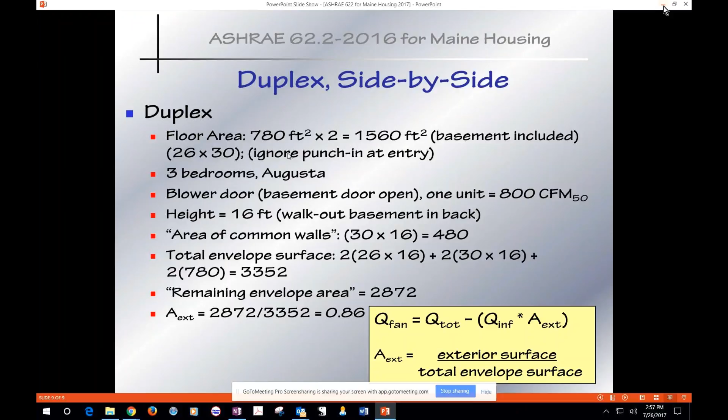Thank you. So I'm going to see if I can take back the screen. I'll hit stop sharing, that should help. Oh, very good, thank you, you did that for me, I didn't even need Karen. Okay, thanks, Rick.

And kitchen, if there is one, not just bath fans. Yeah, so the infiltration ventilation screen has a place to enter kitchen and bath fans. So any ASHRAE related item, which would be your kitchen or your bath. That's going to be the record of what's there at the audit, and that won't be changed.

So then, by the way, you can still use the ASHRAE Excel worksheet if it's just for a single family, single unit building. We will simply change the title of that to 2016 on August 1st, which is the day all of this will go into effect. So you still will have that option. If you are doing a multifamily building, however, you will need to use the red tool.